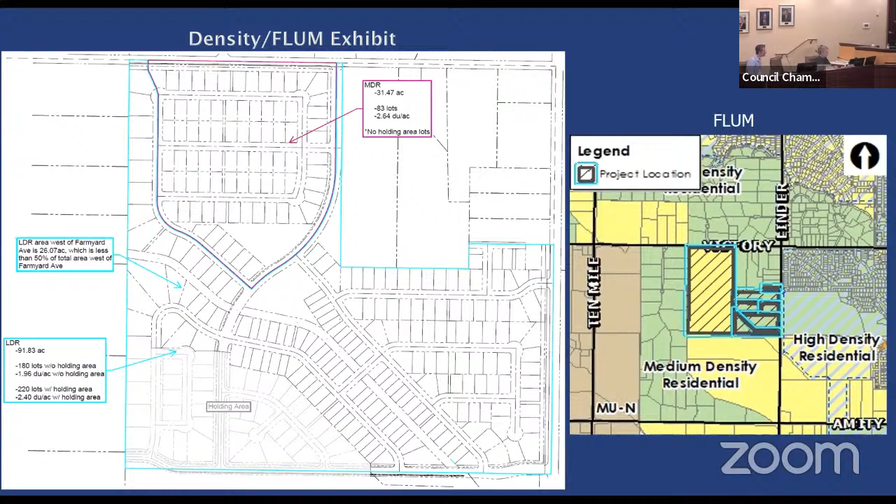The proposed preliminary plat consists of 263 building lots, 33 common lots, and 1 other lot, which is a holding area for future re-subdivision. That holding area is located at the southwest corner of the site here.

2 collector streets are proposed in accord with the master street map. One is a north-south street from Victory, and that is this one right here. See my cursor. The other is the east-west collector street along the southern boundary of the site. These are proposed in accord with the master street map.

Average lot sizes are as follows: half-acre lots in the R2 zone, quarter-acre lots in the R4 zone, and 0.17 acre lots in the R8 zone.

The second phase is located on the northwest portion of the site and includes the southern portion of the collector street. The third phase is located along the southeast portion of the site and includes the east-west collector street access from Linder Road. The fourth phase is the Kelly property and is located along the east side of the development between phases 1 and 3 and fronts on Linder Road. That is this area right here.

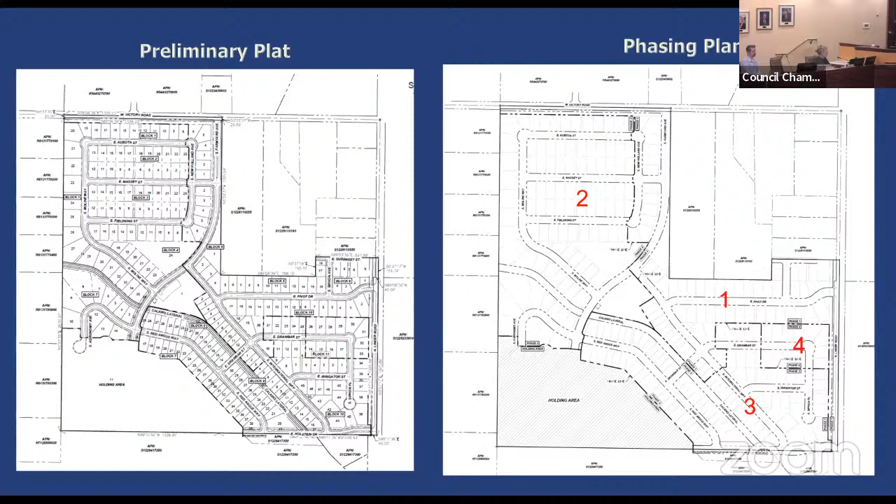A 25-foot wide street buffer is required along Victory and Linder Roads, both arterial streets, and a 20-foot wide buffer is required along internal collector streets, landscaped in accord with UDC standards. Staff is recommending, as a provision of the development agreement, that 10-foot wide detached sidewalks are provided along all collector and arterial streets within and abutting the site for public safety.

The Pathways Master Plan depicts a 10-foot wide pathway along the internal collector streets and along the north side of the Calkins Lateral. Based on the area of each zone, excluding the holding area, a minimum of 12.59 acres of qualified open space is required to be provided within the development. The open space exhibit submitted by the applicant depicts 11.53 acres, which is 1.06 acres below the required amount.

Some of the areas included are considered remnant areas and don't qualify, while other areas, such as the parkways, aren't counted but could qualify if they meet the required standards. The Calkins lateral easement also doesn't qualify if the lateral is piped as proposed and isn't landscaped, but could qualify as linear open space if it's left open within the waterway as an amenity, and a 10-foot wide buffer is provided for active access along the waterway. Staff is recommending that the open space exhibit is revised prior to the council hearing to comply with the minimum standards.

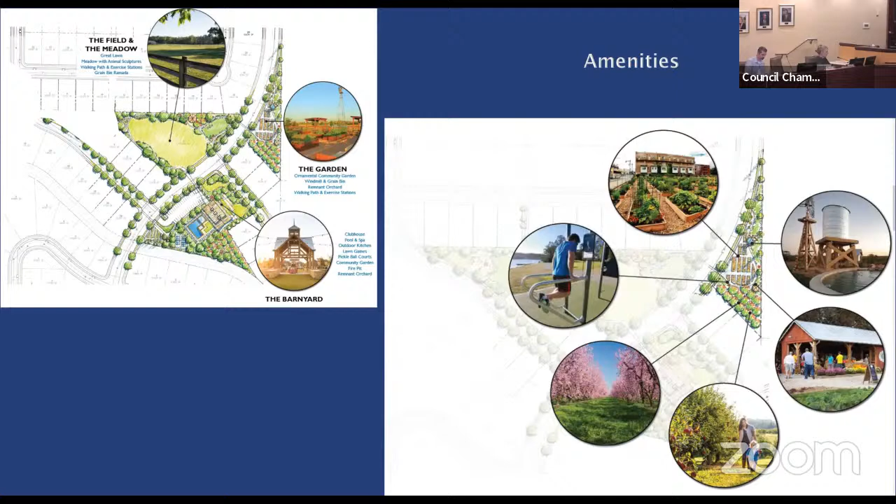A swimming pool and spa, tot lot, and 2 sports courts, pickleball, from the recreation activity area category. Approximately 1.25 miles of multi-use pathways from the pedestrian and bicycle circulation category, and a bicycle repair station from the multimodal category. The holding area will be required to comply with the minimum UDC standards for common area, common open space, and site amenities with re-subdivision.

Staff recommends as a development agreement provision that the use of common open space and site amenities is shared throughout the development area between the holding area and the development proposed with this application.

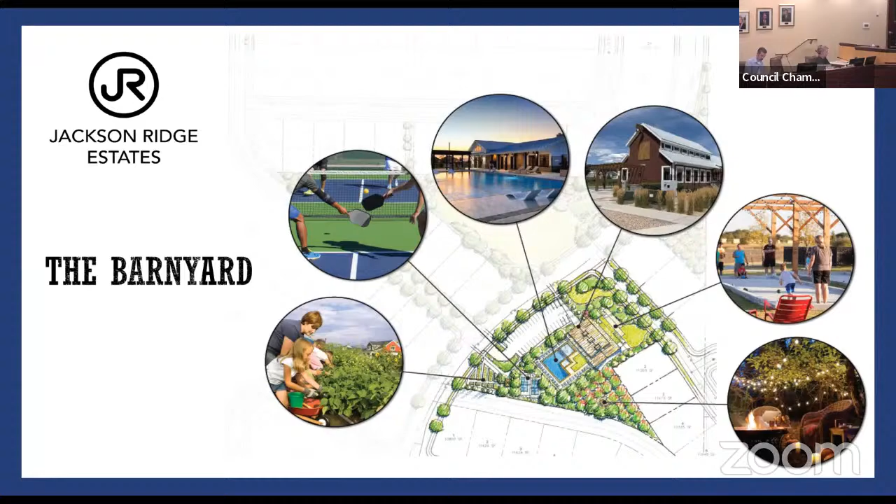The Williams Northwest Gas Pipeline crosses the northeast corner of this site on the Jackson property within a 75-foot wide easement. The Calkins lateral crosses the southwest portion of this site within a 60-foot wide federal easement, 30 feet each side of the center line.

And that is this green area right here, which is a little misrepresentative because the Boise Project Board of Control will not allow any landscaping at all within their easement. So that will not be green space.

The Boise Project Board has agreed to a lesser width of 40 feet on the easement if the lateral is piped as proposed, but will not allow any improvements or landscaping within their easement other than gravel.

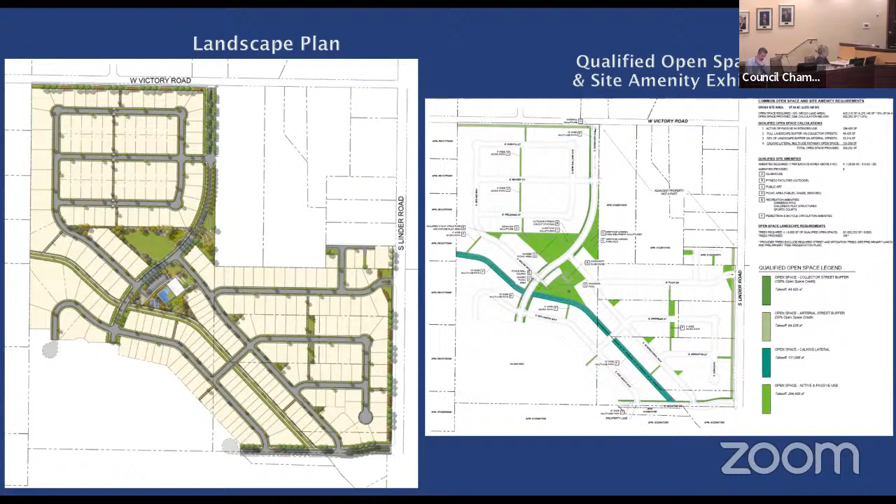The Gibbons lateral is piped and runs off-site along the west boundary of the site. A 7-foot wide easement exists on this property, proposed to run along the rear of abutting building lots. The board will not allow the easement to be located on building lots, so the plat will need to be revised to include this area in a common lot maintained by the homeowners association.

Conceptual building elevations were submitted for the proposed 1- and 2-story single-family residential detached dwellings, and 2 different barn-style concept elevations were submitted for the clubhouse. The architectural style of the homes will be a mix of contemporary forms and modern farmhouse styles.

Building materials range from stone to stucco and board and batten siding with natural colors. Home sizes are planned to be 2,200 square feet or larger, similar to homes in surrounding developments.

Because homes on lots that face collector streets, Farmyard Avenue and Holstein Drive, and arterial streets, Victory and Linder Road, will be highly visible, staff is recommending the rear and/or sides of 2-story homes on these lots incorporate articulation through changes in 2 or more of the following: modulation, such as projections, recesses, step backs, pop-outs, bays, banding, porches, balconies, material types, or other integrated architectural elements to break up monotonous wall planes and roof lines visible from the public streets.

There has been no written testimony submitted on this application. Staff is recommending approval with the requirement of a development agreement per the conditions in the staff report. The applicant is here tonight to present.

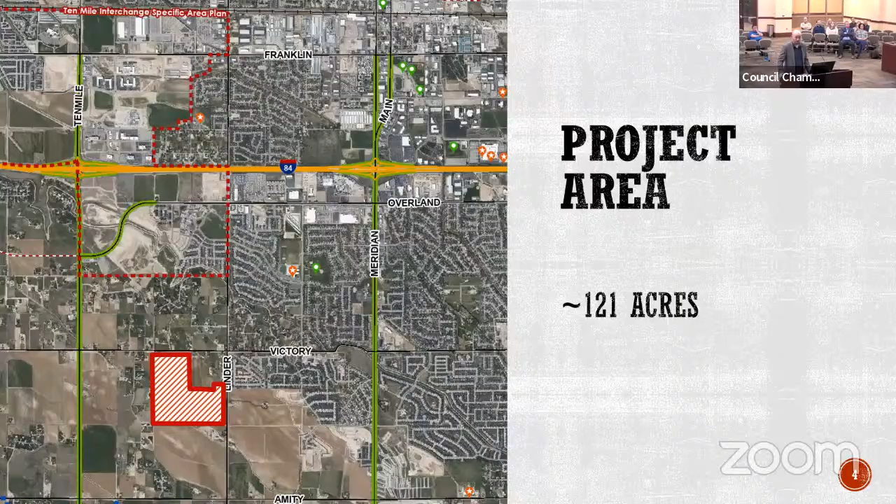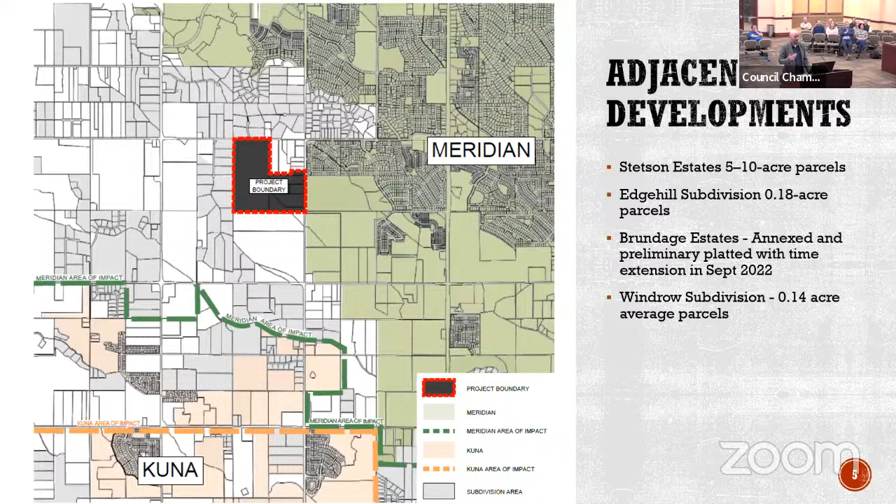I just wanted to remind everybody where we're located. It's got great access to 2 freeway interchanges, right in the line of development as you're working from east to west coming from the city. The adjacent developments show significant development all around it. We're against the city limits, within the area of city impact. As you can see, Kuna's kind of sneaking up on us there on the south. There are large county parcels on our west and north, and again, city development on the east.

I kind of wanted to emphasize this as well, that it's an area ready for development. The square mile immediately to the east has been entitled and is under construction. The Windrow project that some of you might remember came before you just a couple of months ago is that R8 property down on the south here. That has completed the entire block face of Linder in terms of entitlement, so this is certainly ready to move on to development further west.

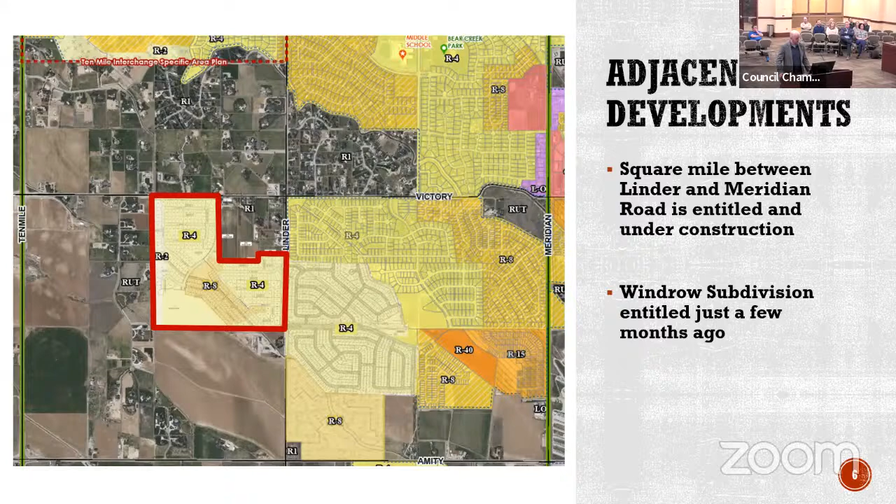There were a number of opportunities and constraints. Sonia mentioned some of it. You've got the fuel pipeline on the northeast, and you have the Calkins lateral and the Givens laterals.

We identified a path forward with regard to Miss Kelly's home, and we'll talk about that here in a little bit. We are providing density that bridges between the more dense development on the east that's coming from the city and the less dense development on the west that's already occurred in the county.

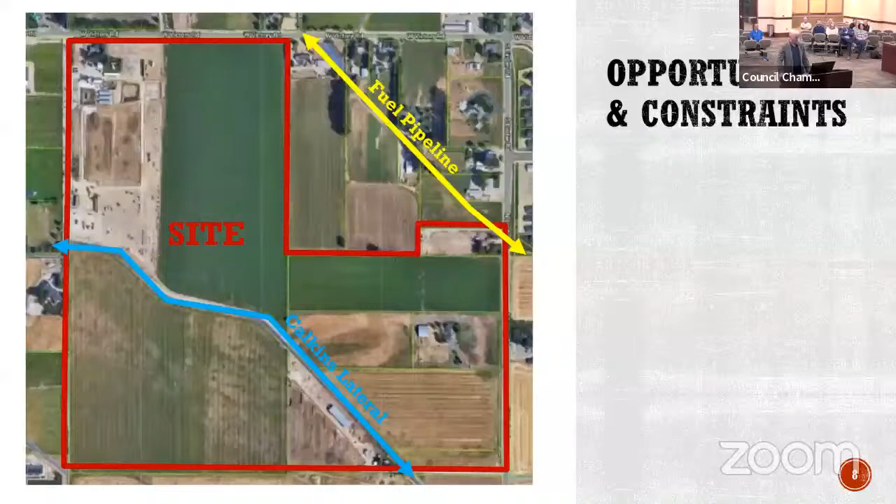So this is just to kind of emphasize the locations of that pipeline and the lateral. This is where things are a little interesting, and you saw that with the map that Sonia showed you guys, and with the land use designations and how they needed to be interpreted.

As you can see here, the property has a low-density residential side and a medium-density residential side. But what made that a little bit challenging is that the medium-density side is on the outside, the area where you would think you'd be going low. So we have the low where we probably could have used some high, and the high where we could probably have used some low.

So we worked with staff, within the comprehensive plan, to slide those designations up to 50% in the medium density area, and that way stay within the comp plan densities. We are within those comp plan densities, and relatively low in order to transition to the county lots on our west.

Zoning as proposed is very consistent with what you see in the areas nearby, with the R4s, the R8s, and as has been shown, we have the R2 on our far west to help transition to the neighboring lots.

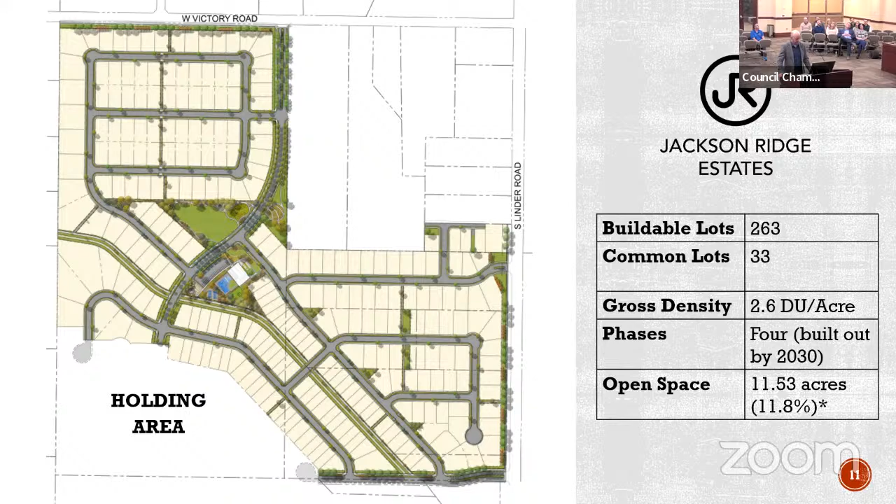Again, this is an overview. As Sonia mentioned, gross density of 2.6 dwelling units per acre and 11.8% open space.

This is a close-up on the zoning, but I did want to emphasize that holding area. That holding area includes 21.05 acres, and that is an area we had originally planned to leave out of the application.

The reason for that is because it can't currently be served. We didn't want to suggest that there's a portion of the property that can't be served and therefore isn't ready for annexation.

We discussed that, have a good relationship with staff, discussed it with Bill. Staff's strong preference was that we actually bring it in now, even though it's not eligible for sewer service, because staff did not want that area to somehow potentially become an enclave in the county if it didn't ultimately develop.

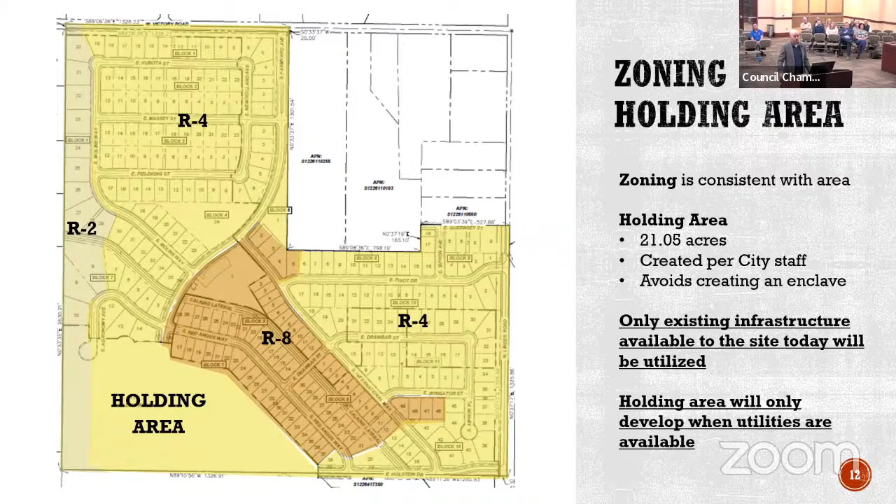So we went ahead and did that, but just want to emphasize that holding area is not going to develop until the services are available. We included it because staff asked us to.

I don't know if this is a record, but it's pretty high: we're able to close 9 existing driveways and replace them with just 3, which is pretty great for area traffic safety. Obviously, every time there's a driveway, there's a potential for conflict.

We're making the expected improvements on Linder and Victory, so you'll have the green space and the 25-foot landscape buffers. Turn lanes will be provided, and internal to the project, we'll have the type of traffic calming you would expect.

So, open space. Our regional pathways are being provided in the locations that the Parks and Pathways folks have requested - on Linder, up on Victory, along our internal collectors, and along the Calkins lateral.

With regard to open space, as I mentioned, we're going to continue to work with staff to get more of the project qualified. To add a bit more detail, Boise Project has actually become more restrictive on what you can do in their easements than they even were before. They've taken the position that you can really only do gravel within their easement at this point - you used to be able to do some turf and some shrubs.

Now it's gravel only, so we're looking at two alternatives. One would be to leave the lateral open - that means a 60-foot space, plus the 20-foot buffer, and then whatever additional you need to make it work. So you could be looking at 90 feet at that point, which to us is a pretty big constraint on the project.

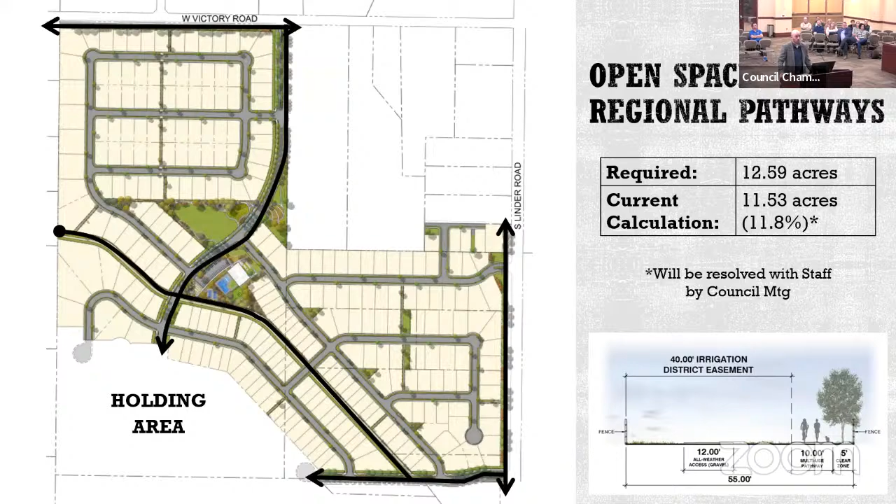Okay, so the amenities—this is a standout element of the project. I've been doing this for about 20 years, and I've done a few large planned communities around the Treasure Valley. Planned communities are a different animal than a regular subdivision. One of the things you have to do is this placemaking exercise, to show there are areas internal to the project where people want to gather and do things. You don't see that on regular subdivisions, right?

That is one of the things that I think is really cool about this project—there really is that level of placemaking here, with the tribute to the farm heritage of the property and the attempts to reuse the farm implements in the architecture and construction. You've got gardens and fields and open spaces to bring everyone together at the center of the project. As Sonia mentioned, they more than double the number of amenity points required with this one, which is pretty remarkable.

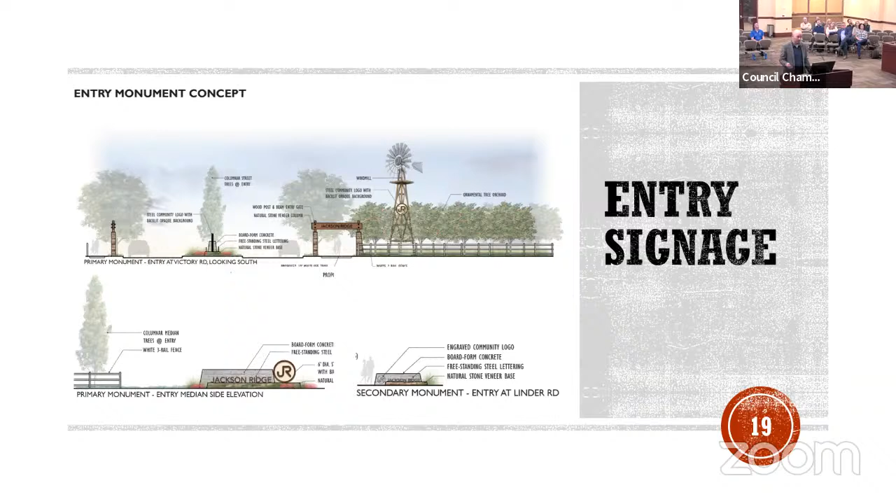This is just to build on that. The idea is to retain that legacy of the family farm, so a lot of these pieces would be reused within the project. The picnic shelter concepts are also a tribute to that agricultural heritage. The clubhouse concepts you've already seen have kind of that barn look to them. And the entry monument concept actually contributes to the placemaking as well, providing something more than a generic typical subdivision monument sign—something that ties the project together and gives you a sense of place as you're driving into the project.

With the home designs you've seen, we anticipate contemporary and modern farmhouse styles.

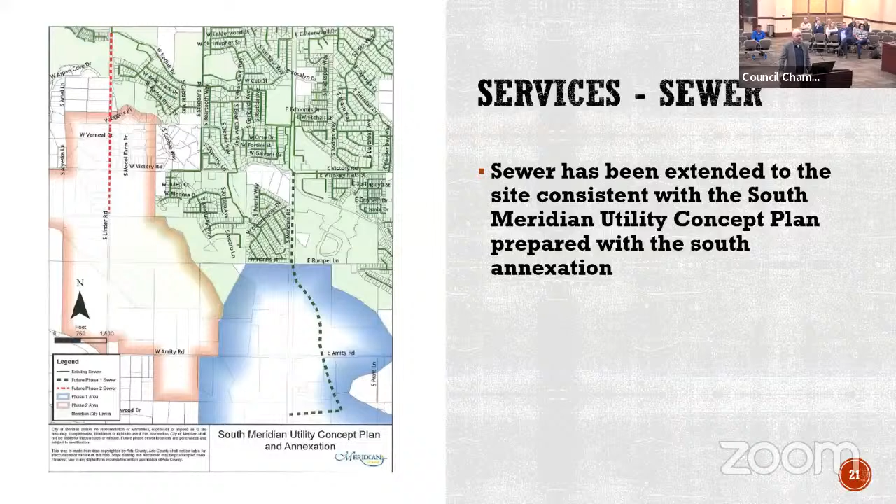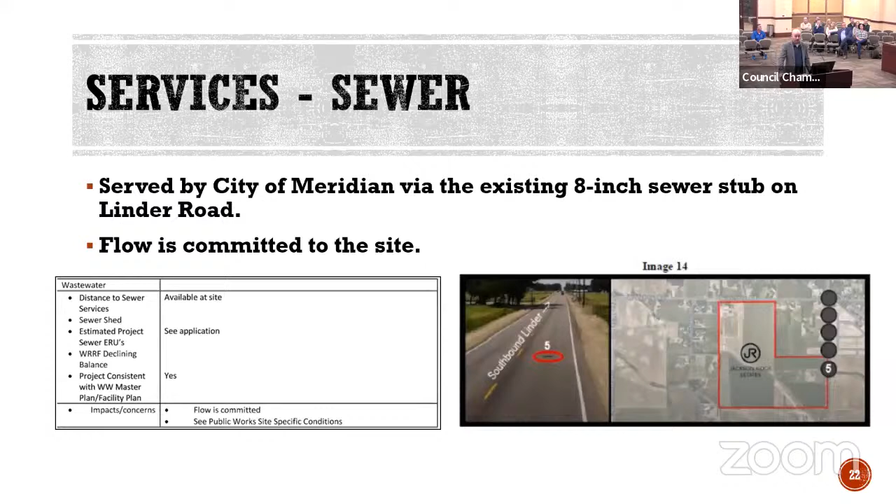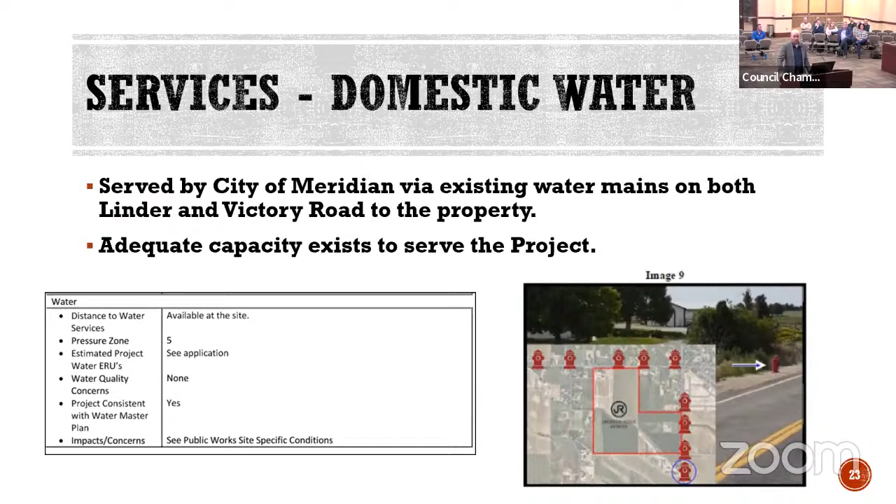So let me wrap this up. As we were looking at the project, there were a number of competing goals we needed to balance. We've got county lots on the west side and city lots on the east side. We've got medium density residential designations on our west where we would like lower, and low density residential on our east where we would like higher. We've figured out a way to be the bridge from the more dense city development to the less dense county development. There are no traffic issues identified by ACHD, and we agree with their report. Again, we think we've worked within the comprehensive plan to bridge the gap between these various densities.

So in terms of our homework, we need to work with staff to qualify an additional acre of open space. We also need to work with staff on the block face questions they raised and the amenity design around the irrigation facilities—again, the Calkins lateral pathway. But we are in agreement with all of the remaining conditions, with just one tweak I'll mention. These are some of the things that have been addressed, including the addition of the VRT bus stop. We're adding a multimodal amenity—a bike repair stand or something like that—which, in the larger concept of this project with the number of amenities we've provided, isn't that big of a deal, but certainly helps.

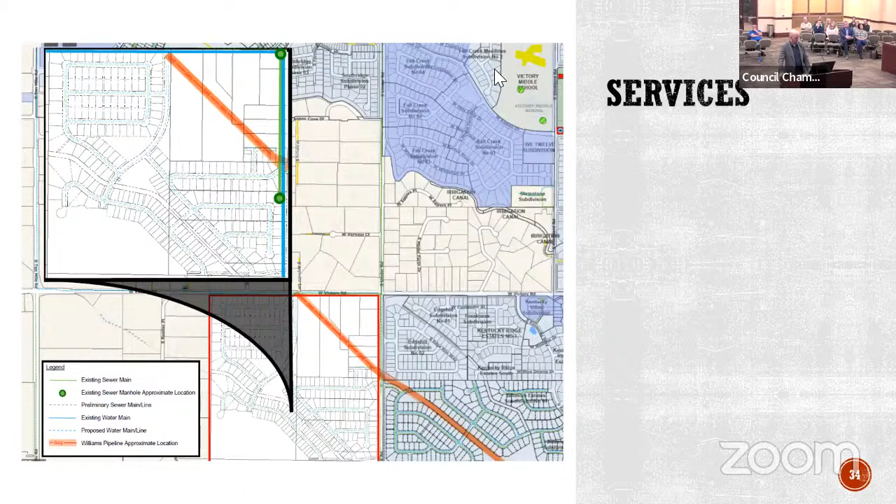It does to an extent. And I didn't look at the phasing map closely, the lines were a little dashed, it was a little hard to read. So why not in phase 4? Is that section of the property getting developed before? Phase 4 is not adjacent to the boundary of that lot, is why. Okay, thank you. It needs to be contiguous.

Mr. Chairman, could I ask this question when the time was appropriate? I just want to clarify the request from the applicant, from Mr. Clark. As I look at the phasing plan right now, phase 2 and phase 3 only are adjacent to the holding area. But it seems like your language gets to the exact same spot as what the staff condition requires, just sort of worded differently. What am I missing there? Because I don't understand the distinction.

Mr. Chair, Attorney Starman. The reason I laughed is because my concern with the condition was that someone would ask that question, because I read the condition as implying that it was somehow tied into the development of phase 3. I don't want there to be any confusion over the fact that we don't think the holding area can develop right now, and that we're including it only at staff's request. So the suggested change I've put forward really arrives at the same point when it comes to platting it as a mega lot, if that's what was intended. But I do want to emphasize, it can't develop. We have to wait until utilities are available.

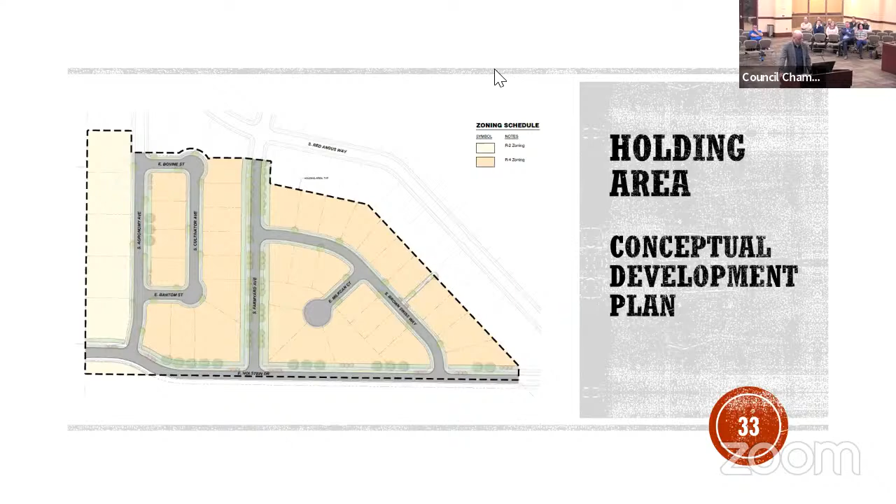Mr. Chairman, just to clarify, thank you Mr. Clark, that's helpful. So just to reframe, I think the language is similar. I understand Mr. Clark's point in trying to create clarity relative to the holding area. As I understand the condition, both what staff's trying to accomplish and the applicant's is, with the way Mr. Clark proposed language, when it says when the phases surrounding the holding area have been subdivided, the mega lot needs to be platted at that point as well. And since the mega lot is only surrounded by phase 2 and phase 3, it would have to be platted at the time phase 3 is platted. Would you agree with that, Mr. Clark? Yeah, I don't disagree with that. Okay, so I think you get to the same spot, but I'll leave it at that. I just wanted to clarify, because I wasn't seeing the distinction, other than I understand Mr. Clark's point relative to clarity on the holding area.

Yeah, and I'll go back, now that I understand phase 4 a little better, I think if you just got rid of phase 4, did phase 3, and did that all in the last one, then this would probably be moot for the most part. So in other words, phase 4 would be consolidated into phase 3? Correct, and again, that would just move up that homeowner's timeline, correct. Again, there's a whole lot of things going on that affect a whole lot of people, and we're trying to protect one homeowner - protect's probably not the right word, but basically give them an extended period of time to enjoy what they have on their property, which I completely understand. But at the same time, if you're going to sell it and you're going to do it, it's just part of the plan. So let's not drag this on for everybody else would be my point. That's just creating a little bit more work for folks to have to do in order to accommodate that, when to me, let's just make it part of phase 3, plat the holding area, and we're done.

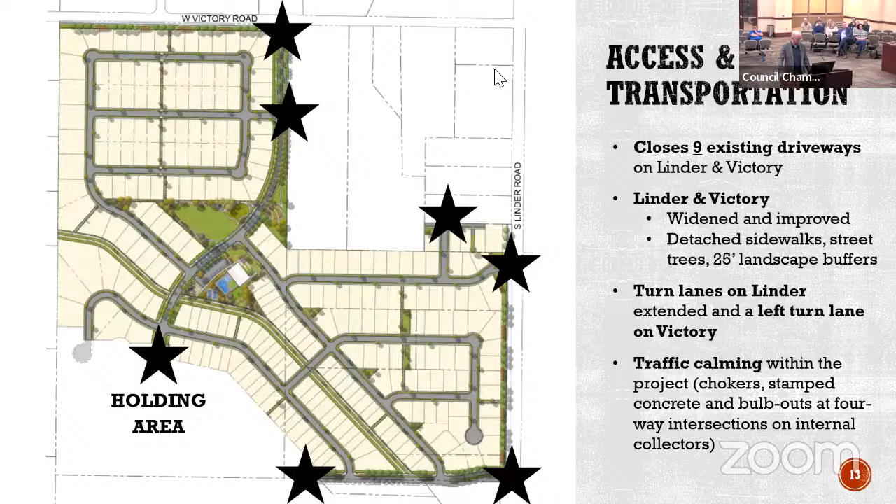Okay, so since 21 and 22, you've seen additional development in that square mile between Linder and Meridian, including the project that is immediately across the street, which is the R8 project below. In that 21 to 22 period, the city council has also extended the plat approvals for Brundage Estates, which is immediately across the street, and the development and construction in that square mile has continued apace since then. So in my view, there's been 2 more years.

There's been several applications that have been approved, their applications have been extended. The utilities, again, are all there, and they were there at the time. And there seems to have been some confusion when that decision was made as to whether they were available. Yeah.

Thank you, and that's what I was looking for, to just confirm that this wasn't already there when they were considering it at the time. These are new developments. Okay, that's correct. Mr. Chairman, just to follow, if I could.

One of the things that we've talked about a lot is the transition to the larger county areas. And I noticed in the staff report there was a comment that this body, this commission, should consider whether the surrounding neighbors and the public believe that was an adequate transition. And I wondered if you'd gotten any feedback from those neighbors about whether they thought that was indeed a solid transition. Yeah, Commissioner Grace, I wasn't at the neighborhood meeting.

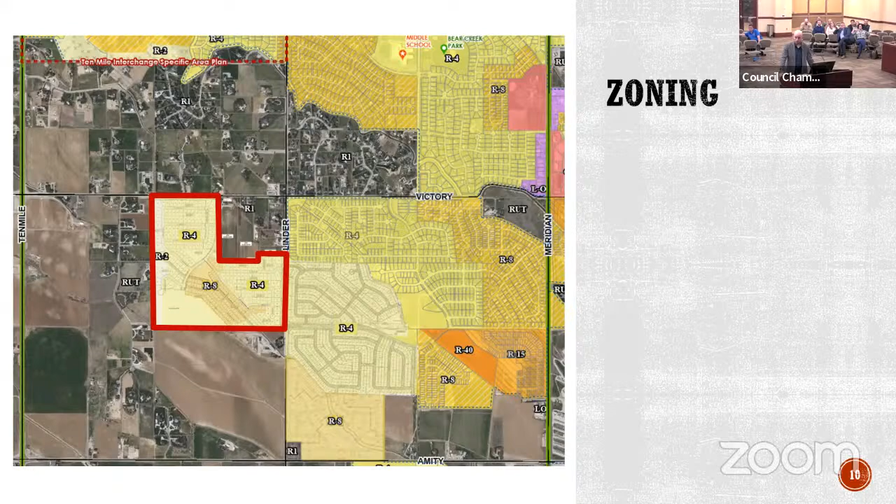And again, our densities are very much on the low end for what the comprehensive plan calls for in this area. About those densities, I just want to make sure I understand: are you saying that in order to achieve an average gross density that complies with the comp plan, you use parts of the low density with the medium density? Was that what it was? Yeah, let me show you.

So the comprehensive plan anticipates some flexibility when it comes to the way it's to be interpreted. Essentially what it says is that you are allowed to use adjacent comp plan designations so long as you don't go across an arterial or a collector, and so long as you don't use up more than 50% of that designation's area within the project. So if you look here—sorry, the mouse is not being very friendly.

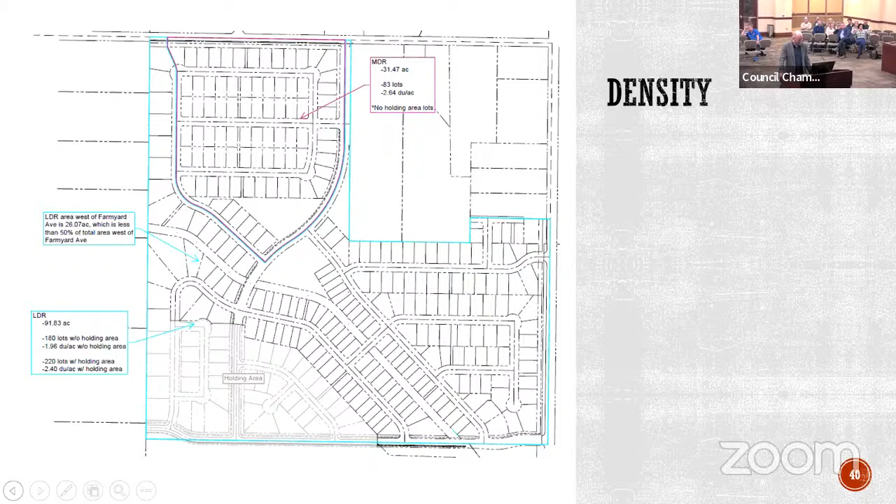It took us a minute to wrap our heads around it too. Thank you, Mr. Go ahead. Mr. Chair, Commissioner Smith, go ahead. So now that you've gotten all the way over here, a question back on the phasing.

Oh sure, you can have them go to the very last slide. Yeah, on the opposite end. For the staff, or I don't know, for Kurt, is there anything in code or requirement for how long a phase can last? Because I'm thinking, to my mind, we could include language to assure that holding area would be platted, but with an understanding it wouldn't be developed. Also with the phase 4 aspect, is there anything that prevents them from completing a portion of phase 3 and giving that homeowner as much time as possible within the phase? Or is there something that requires them to finish within, say, a 2-year time period?

Yes, Chairman, Commissioner Smith, there's a 2-year time limit that they have to obtain the city engineer's signature on the final plat. They can request an extension on that. But just to clarify, there are no improvements planned, proposed, or required in the holding area, so there's nothing there for us to require them to develop.

Thank you, so that 2 years, just to clarify, sorry, it's been a long day. That's on a per-phase level? It is, yes. Okay, cool, thank you.

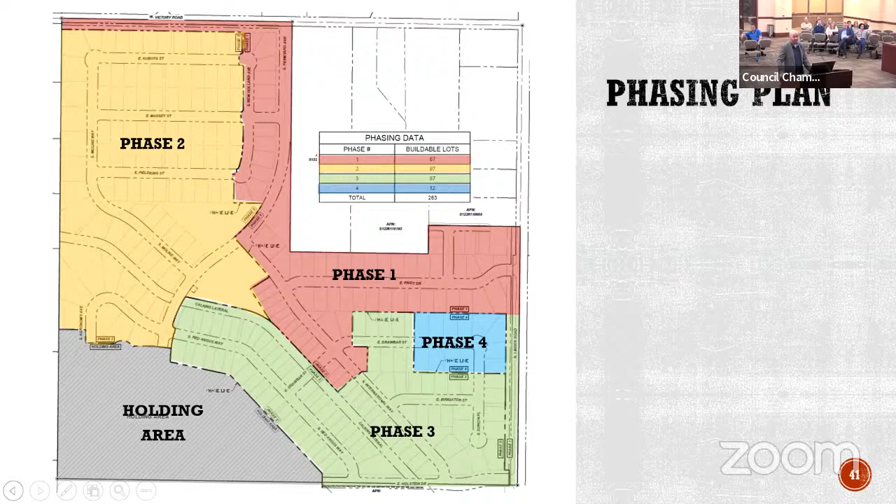Commissioners, anything else? All right. Thank you very much, Mr.

Chair, before we turn it over to public testimony, I'd also want to let the commission know that their phasing plan is off a little bit. I believe when I read the staff report, they were going to do all of the street frontages with phase one. So that graphic doesn't represent it going along Linder Road. I just wanted to point out there's a significant infrastructure investment there with phase one as well, along the street frontages.

Okay, thank you, appreciate that input. All right, all good? Thanks. Madam Clerk, do we have anybody signed up to testify? Mr. Chair, no one has signed up. There's a bunch of people in here. Does anybody want to come up and testify? Come right on, we always love the public to come in and tell us what they think.

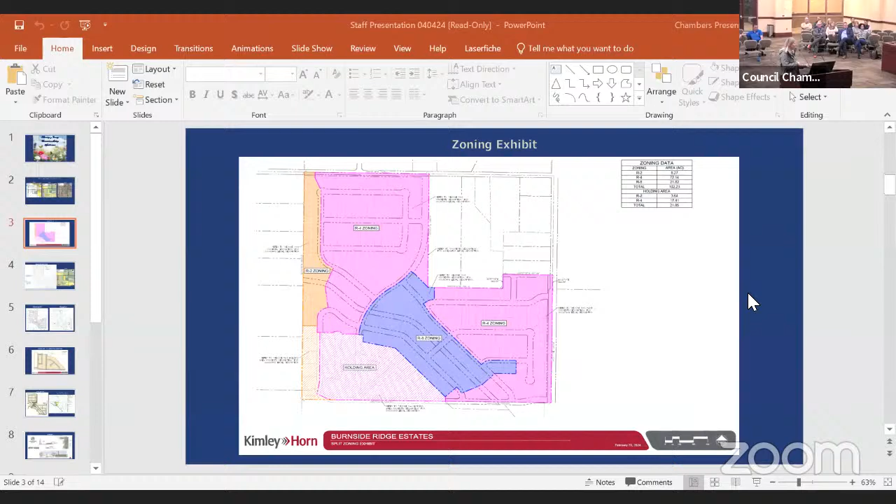So at that point, what happens to density? Because it's a new subdivision, do they have to start back over and it's medium density, and they have no low density to switch it with? And because the original, back in '21, that area extended the half-acre lots - what are the chances that all changes, because this is approved and then they have to go back and replat that? And then they're now required to do everything a subdivision does, such as another 10% of open space and everything else, and densities aren't met.

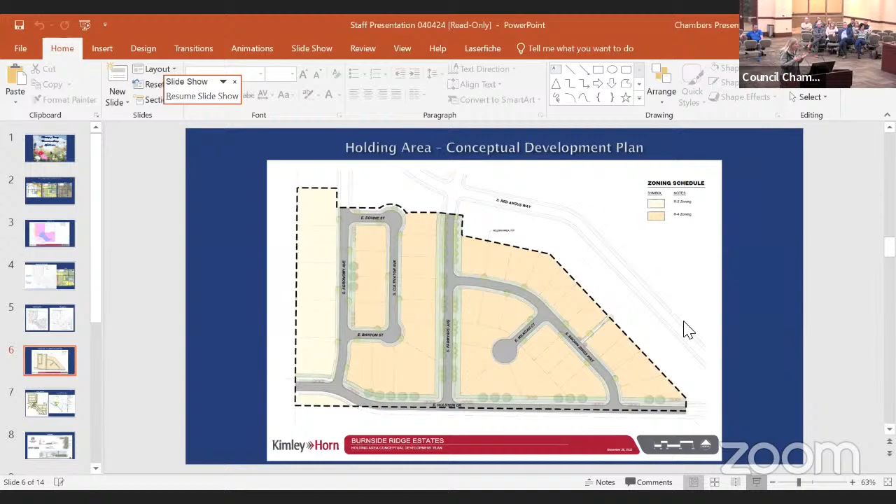So then those lots get lower and they're up against 5 and 10 acre, and that's the transition that they were trying to be respectful of. That's why staff asked them to submit this conceptual development plan that's before you here. We wanted to ensure that there wasn't a higher density developed on that site. The density they're showing is consistent with the density they're approved with this application.

Okay, so if this is approved, then they are tied to develop this property in general conformance with this conceptual development plan. If anything, the lots could possibly be reduced if they have to add space for common open space, but it shouldn't be increased.

We've seen this before, and I'm glad staff did this, because we've had applications come through where either a conceptual plan wasn't submitted, leading to something that would be an enclave, or they're trying to have a real huge variance to what that would look like. This right here kind of helps protect against that. It in no way makes it so this is exactly what they're going to do, but it does keep the essence of what they're asking with the larger lots abutting the county land and things like that.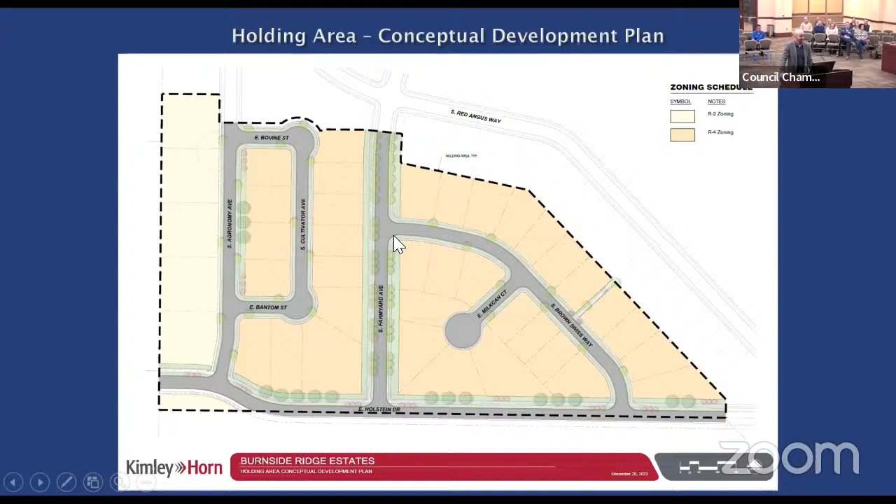Commissioners, any final questions? Commissioner Smith, go ahead. Mr. Chair. Yeah, just one thing before we close, and to make sure I'm on the right page with what the discussion was.

Are there any, I know there's a preference for phase 4 to be separate and distinct to give that homeowner as much time. If we were to recommend consolidation of phase 4 and phase 3, is there any strong opposition you have, or is that fine? We would just like to err on the side of giving that homeowner more time. So there are no hills to die on, but we would like to give that homeowner more time if possible. We would very much appreciate a positive recommendation, and we always like to hear from the Planning and Zoning Commission what your thoughts are to be included in that recommendation, and then we can take that to the council and continue the conversation.

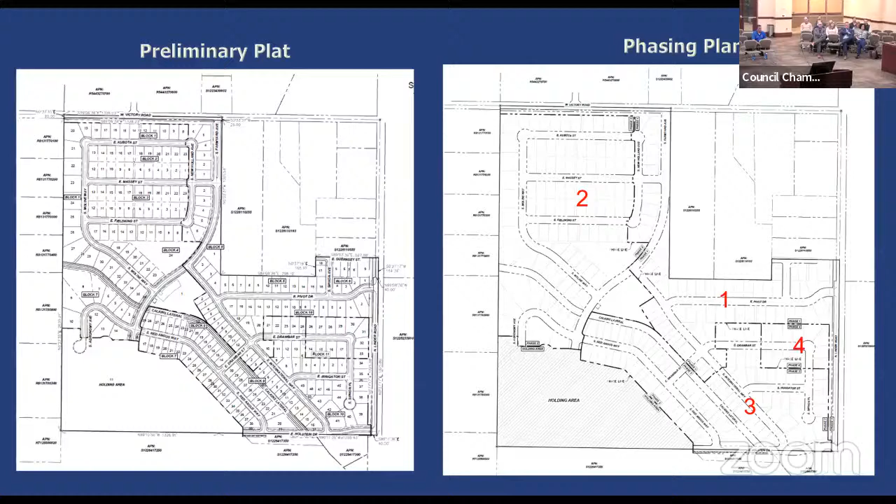Who would like to go first? Any and all. Mr. Chair. Commissioner Larcher, go right ahead. Took me a minute to remember this because 2021 was a little while back, but it all looks good. Now that there are other subdivisions in the area, it fits even more, especially with the low density.

I guess my only comment is, and I know there'll be continued conversations over the Culkins lateral, your concept is fields and meadows and gardens and barnyards, and to tile in the open space, or excuse me, the lateral, seems to kind of go against that grain. I understand the space will be wide enough to go through, and you'll put landscaping in as needed, but as a citizen of Meridian and as a commissioner on this board, the more we're tiling in, the more we're taking away the history of the farm that came with it in the first place. With you trying to honor the farm life out there, to tile it in, I hope you can come up with a good solution to possibly keep, if not all of it, some of it open. I know irrigation has a very definite way of how they want to do things, so they're difficult to work with. I respect and understand that, because water's been a big deal for a very long time. But I would say the only thing I would like to see, as a commissioner and as a citizen, is to see that those laterals continue to stay open. Other than that, the phasing and the holding area, it all makes sense to me.